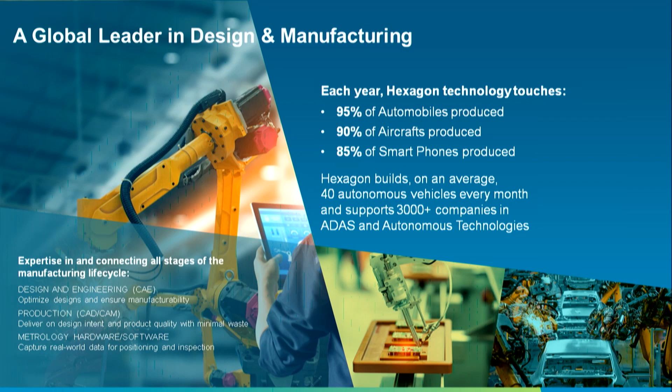Let me start with who we are. Hexagon is a global leader in sensor, software and autonomous technologies. We're leaders in the design and manufacture space. Around 95% of vehicles manufactured, 90% of aircrafts manufactured, and 85% of smartphones made are touched by our technologies. But our core competency is in connecting the different stages of manufacturing, like design and engineering, production, manufacturing, and inspection through metrology devices.

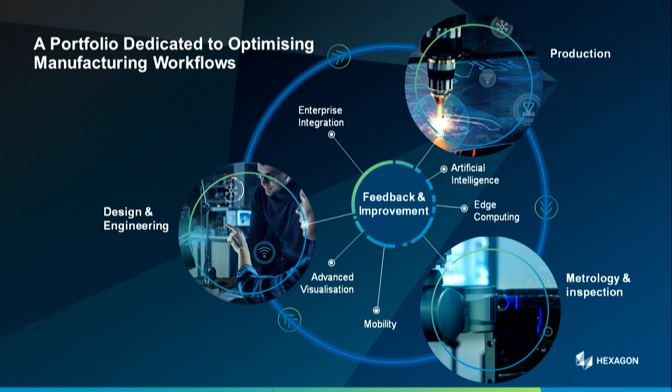Our portfolio under Manufacturing Intelligence Division consists of design and engineering, which is mainly into simulation softwares where performance is evaluated in the virtual world, from the concept design stage to the final stage of the design. Post that, we have production softwares like CAD, CAM softwares, and also manufacturing process optimization tools. And finally, to inspect the quality, obviously the metrology part, mainly on the hardware side.

So in today's talk, I'll touch upon AI ML's emergence in each of these domains. Let me start with the simulation part.

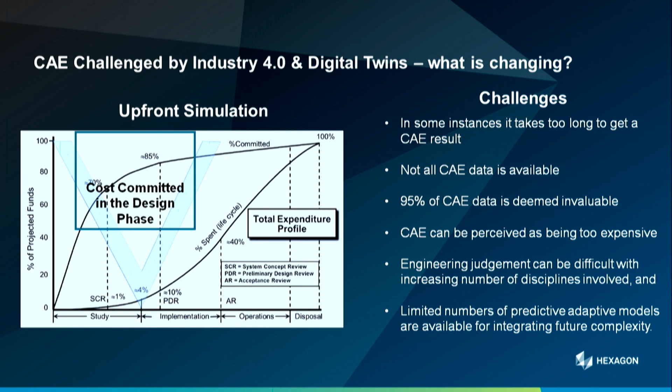But now, moving on to the world of Industry 4.0 and digital twins, there's always some limitation of simulation scaling up to the manufacturing side or the digital twin side. It takes too long, too much time for CAE results to come out. CAE data is not available, or too much data is available to make sense of it. And also a limited number of predictive adaptive models are available in the market.

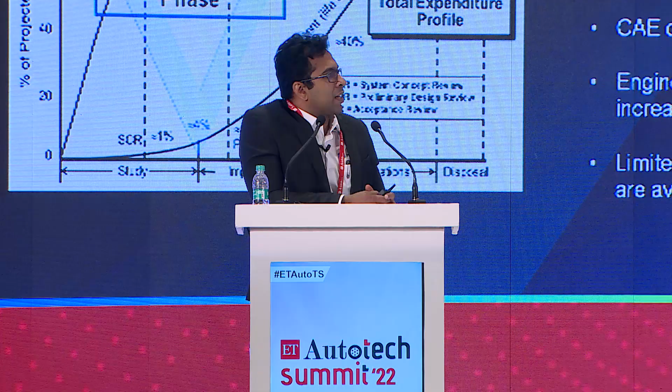So the expectation is that simulation is now powering the design phase. But what about the predictive digital twins? How can simulation help, with time as a constraint? That is where a lot of focus is, and that's where AI and ML is playing a big role.

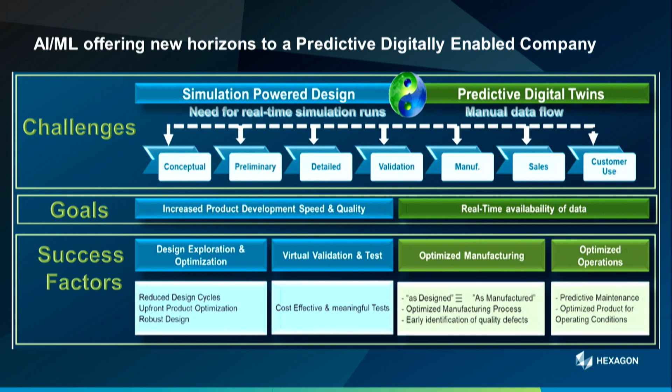So our technology positioning is mainly with the product called ODYSSEE. ODYSSEE is a solution establishing a link between traditional CAE system modeling and machine learning algorithms.

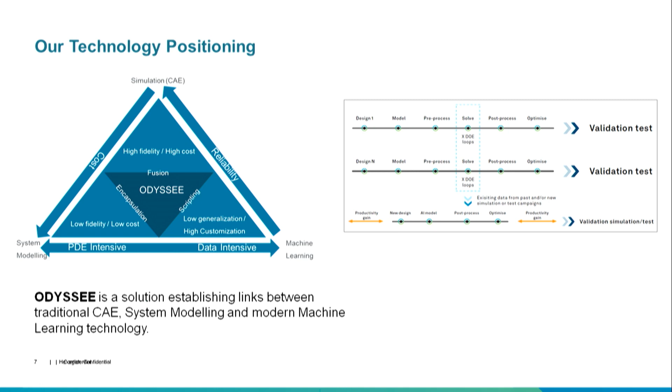How it tries to reduce the time taken, for real-time simulation, is through using AI models in your conventional CAE approach. If you look at the conventional CAE approach, the process is: you have a design, you model it, that's the pre-processing part, then the run happens, where the numerical calculations are solved, the PDEs are solved, and you have results which are then optimized for the performance you look for. But these kind of iterations take a lot of time. That's where these AI models can help reduce a lot of time, in a very big way, which you will see in the coming examples.

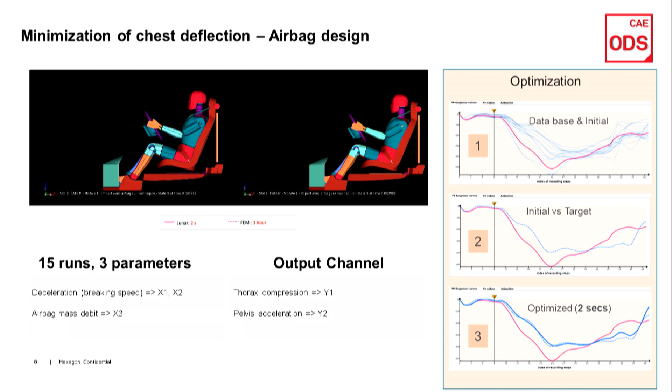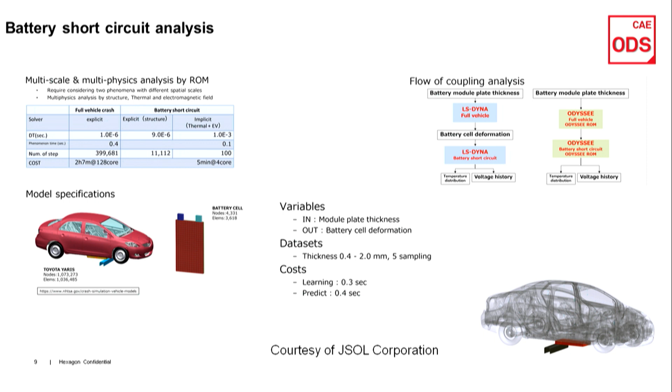So here we applied the same concept. If you see the accuracy of the result, it's almost a 98% match in terms of deformation, voltage, and also the temperature distribution. You can see the plots here of deformation, temperature distribution and voltage. They are almost an exact match with 98% correlation.

With that sort of correlation, the time taken is 2% of the actual finite element analysis. Yes, again, you need to run a few jobs to train your AI model, which is much less when you compare it with the DOE-based approach which the industry follows today.

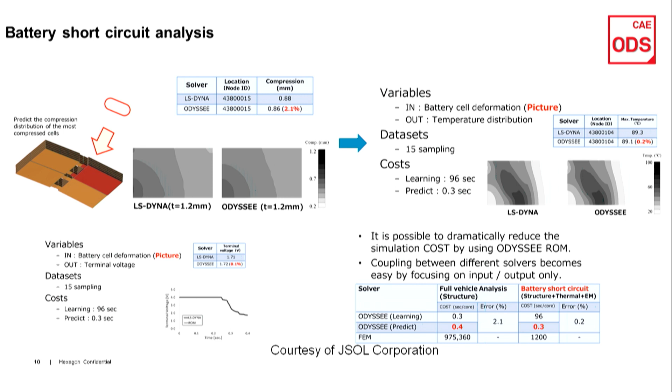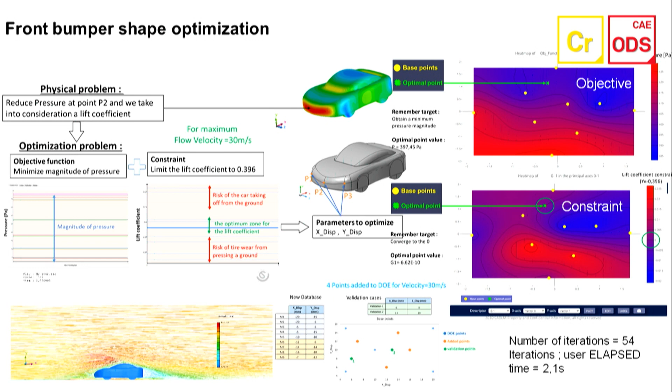One more example of a computational fluid dynamics case where a front bumper shape optimization is done, where the objective is to minimize the pressure at a particular point in a front bumper. At the same time, the lift coefficient has been kept as a constraint for this optimization problem.

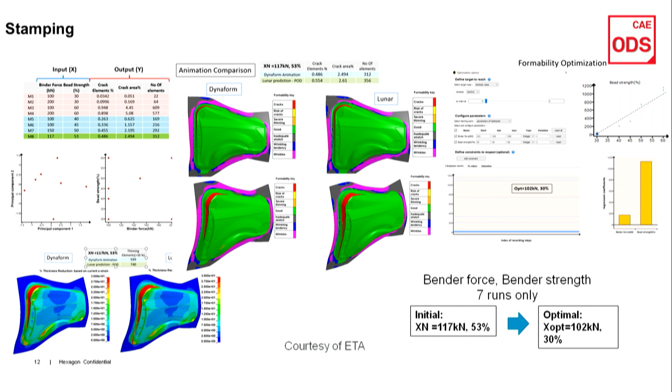This can also be extended to your manufacturing process simulation, like stamping and welding, where these kinds of AI models can work in the background to help people who are not hands-on with such simulation work. People on the floor can use these models to quickly optimize the stamping force, welding directions and path, and also the clamping locations. Such optimizations can be worked around in minimum time.

Another important area of AI/ML is material development and material exploration. There's a lot of focus these days, either from the weight reduction point of view or from a performance point of view. Adoption of non-metals is increasing today, where we don't have a lot of properties of these materials. Exploration is one part, and having material properties for different conditions and different tests. So the case here is where you have some tests done on some of these materials, and the AI model can help you develop the outputs for the rest of the tests using the database you have.

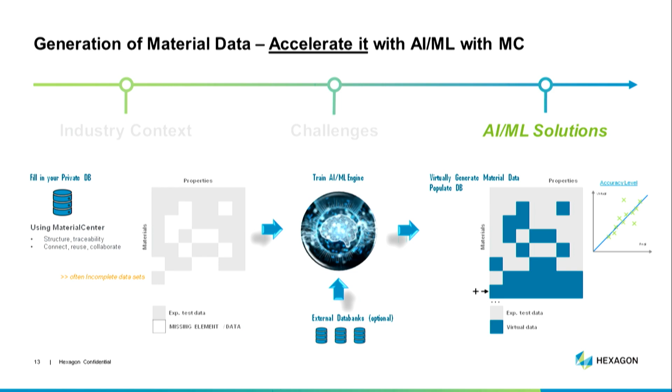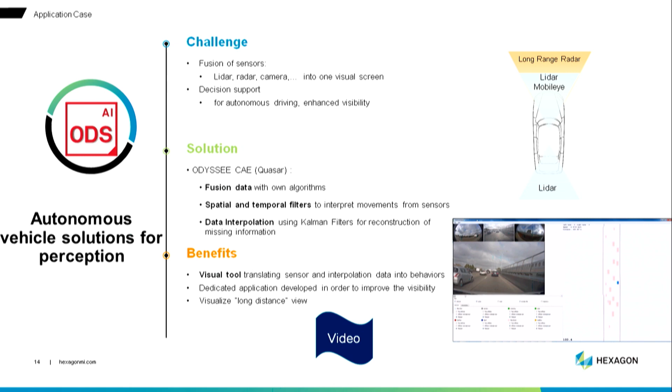Also, in the development of autonomous vehicles, we have moved from physical tests to simulations in a big way, where 1 billion kilometers can be simulated in a week's time, and various scenarios can be simulated. But when you talk about various scenarios for an autonomous vehicle, it can be an infinite situation, where programs like this can help you pick the edge cases and simulate around them. In this case, it is a fusion of visual sensors which was performed.

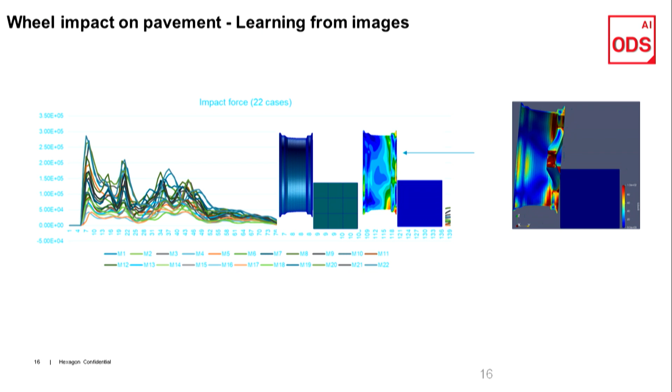This is another example of learning from images, where a tire wheel rim impact analysis is performed on 22-odd different designs, where the number of spokes and the impact velocities are the two variables. With this database, you can predict; you can see the curves over there. It is almost matching with 90% correlation with what is predicted using these AI models.

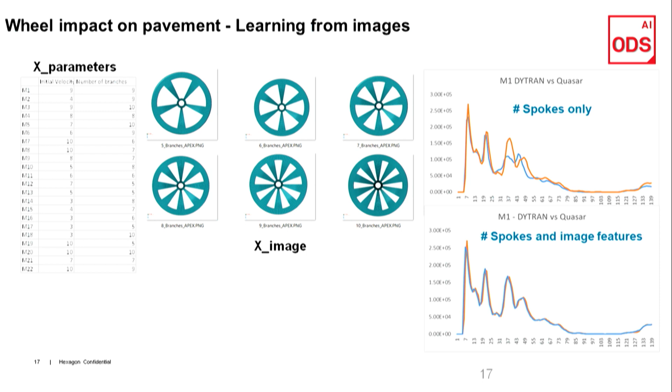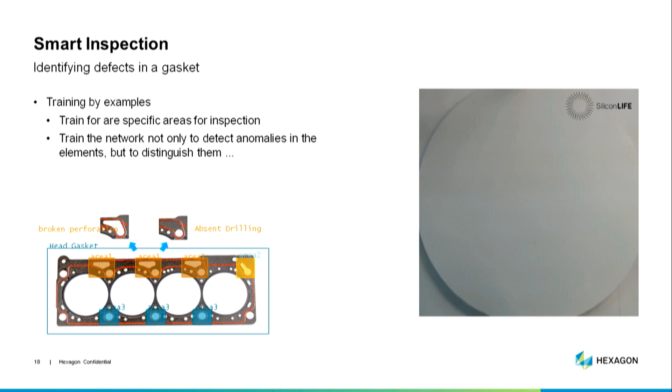That was more on the simulation side. Also, from the smart inspection point of view, we have tools which can help you detect anomalies and defects within your designs. Whether the tolerances are fine, these kinds of checks can be visually and automatically performed using these kinds of programs. The image from the camera is studied, the model needs to be trained, and then it identifies if there is any issue with the quality of the product.

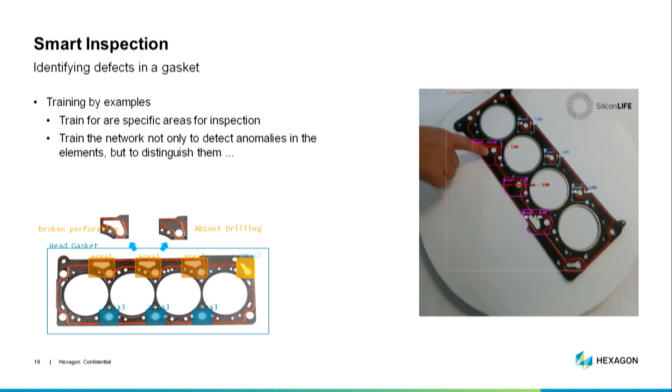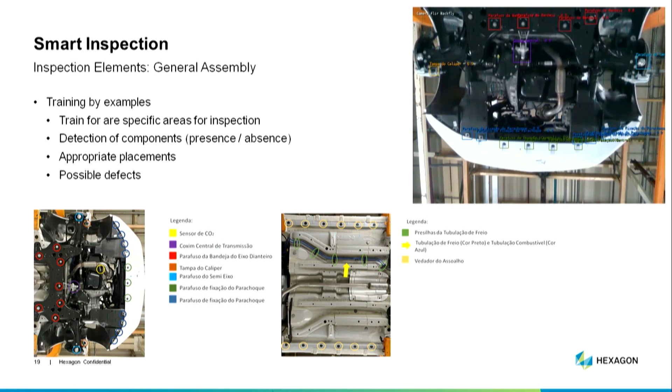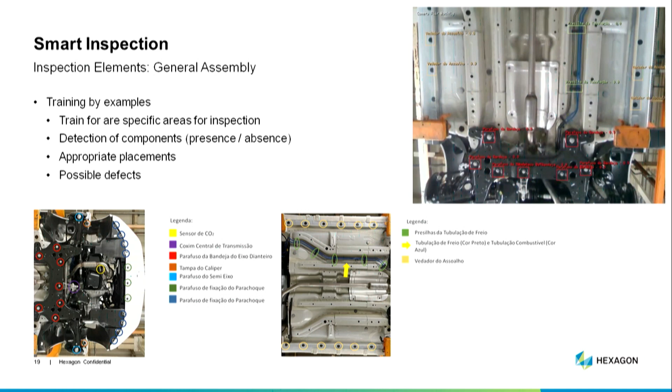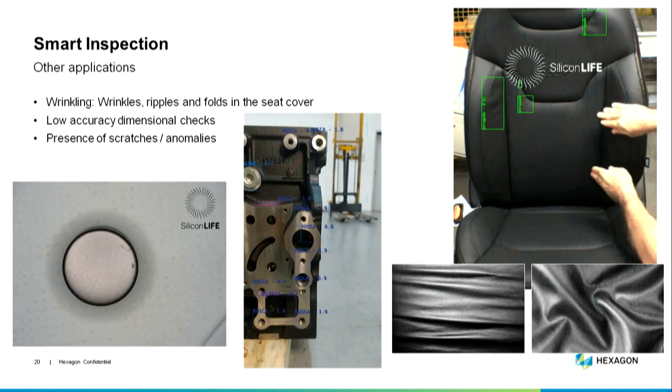Some more examples. Here, the model is initially trained to detect the presence or absence of parts, or misplacement of parts within the vehicle. It scans through your vehicle and tells you this part has a defect, or this is misplaced, or this is missing. That sort of work can be done using such a tool. Also, in some more cases, wrinkles, ripples or scratches in your subsystem or vehicle can be visually analyzed to detect these kinds of issues.

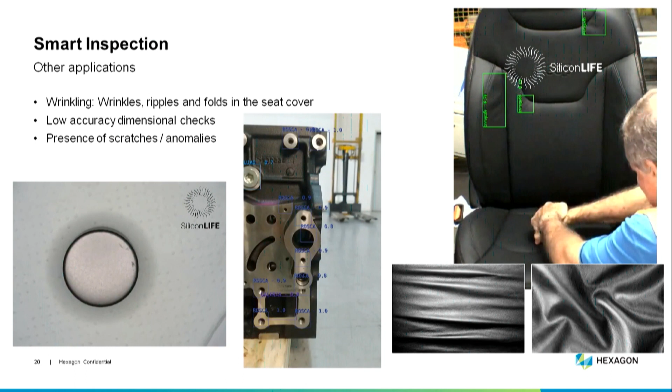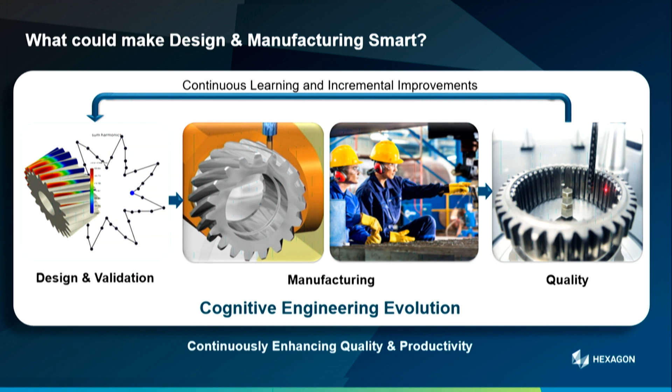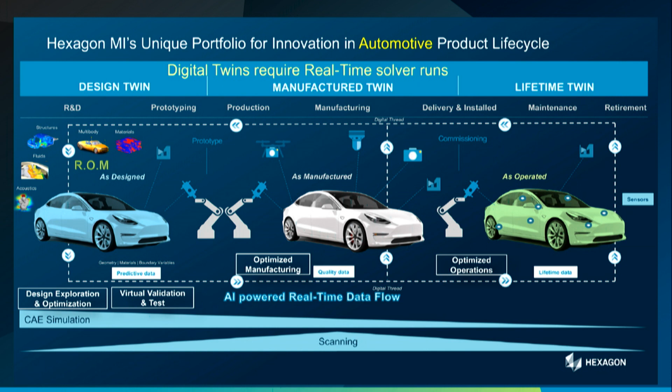So finally, as I said in the beginning, our core competency is connecting these three important verticals of the manufacturing life cycle, that is design and validation, manufacturing, and quality, through a digital thread. That's how we make it learn continuously and improve productivity and quality. A design twin, a manufactured twin and a lifetime twin are all connected through AI-powered real-time data flow threads. So this is a brief of what I could talk about on AI/ML's application areas.